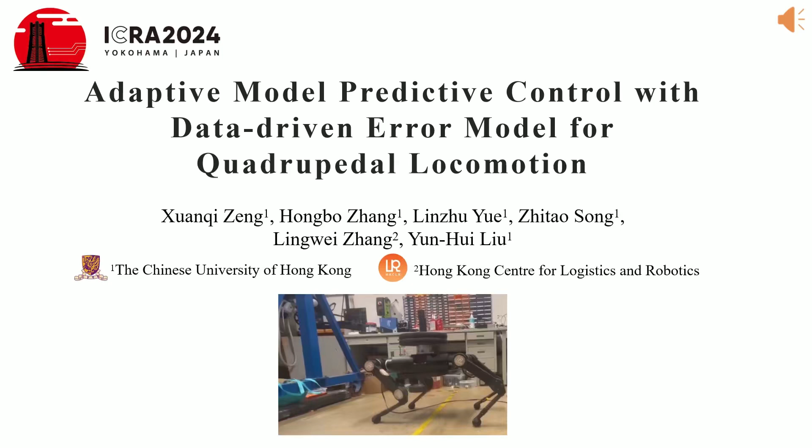I am here to introduce Adaptive Model Predictive Control with Data-Driven Error Model for Quadrupedal Locomotion to deal with the model uncertainties problem.

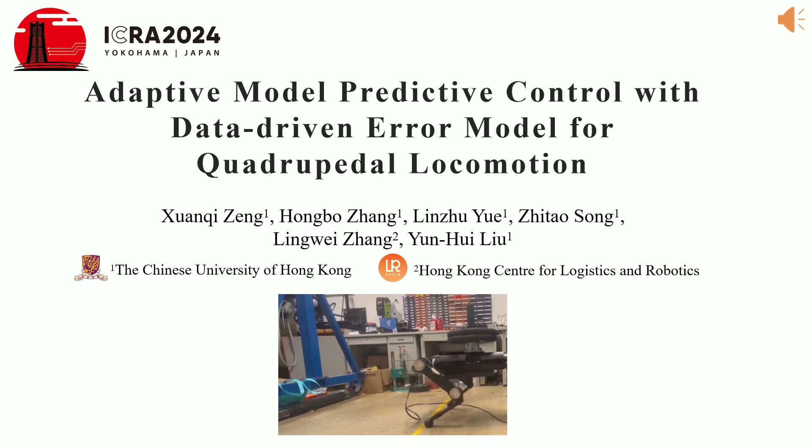Helping humans carry payloads is a common and promising application scenario for quadruped robots. However, the payload's parameters are variable for different tasks, and it is challenging to model it online without extra sensors.

Our approach leverages real-world data from sensors to compensate for defects in the control model. Specifically, we employ the autoregressive moving average vector (ARMAV) model to construct the state error model of the quadruped robot using data.

The predicted state errors are then used to adjust the predicted future robot states generated by MPC. By such an approach, our proposed controller can provide more accurate inputs to the system, enabling it to achieve desired states.

This holds even in the presence of model parameter inaccuracies or disturbances. The proposed controller exhibits the capability to partially eliminate the disparity between the model and the real-world robot, thereby enhancing the locomotion performance of quadruped robots.

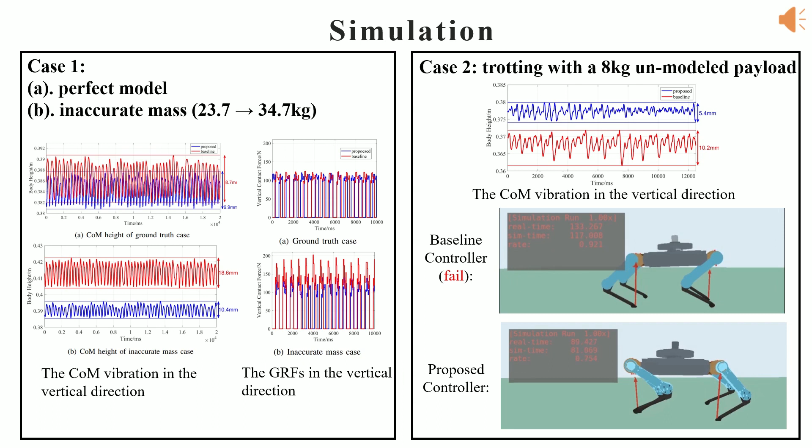The first hardware experiment is to evaluate the performance of the proposed controller in dealing with variable unmodeled payloads.

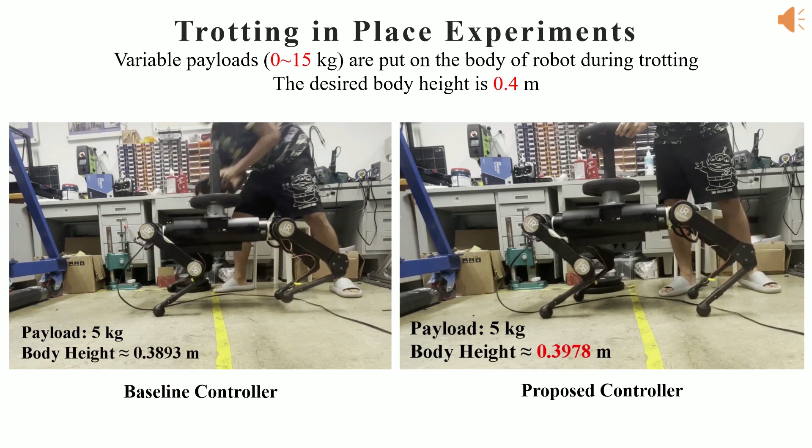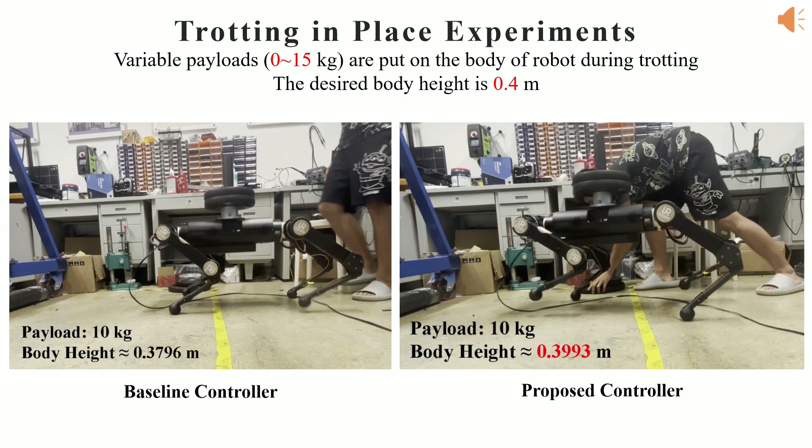In this experiment, payloads from 5 kilograms to 15 kilograms are added to the Sirius belt during trotting in place, one by one. Concurrently, the data of real robot states with the baseline controller and proposed controller are recorded to evaluate their performance.

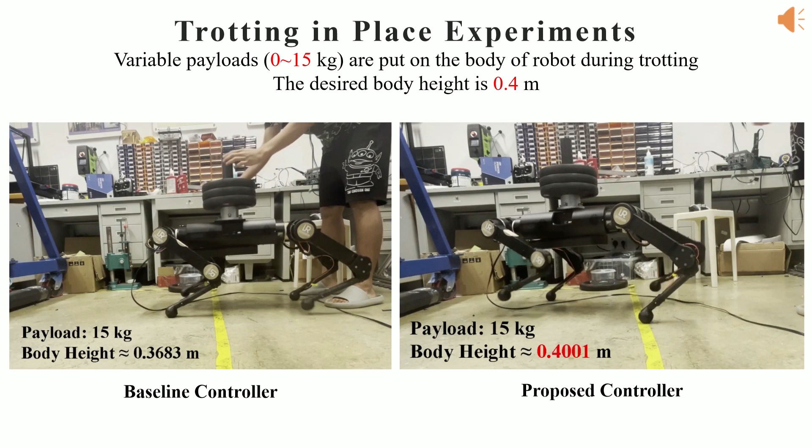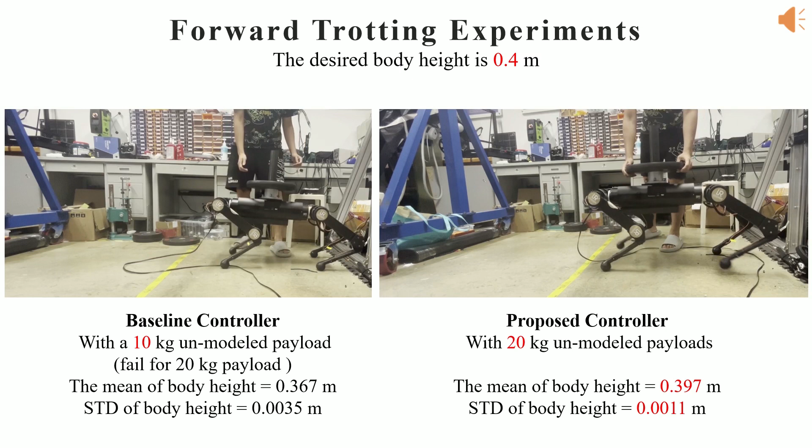The second experiment is to evaluate the performance of the proposed controller in the robot's forward trotting. The videos show that the proposed controller enables the Sirius belt, carrying a 20-kilogram unmodeled payload, to achieve stable forward trotting.

The mean of COM height is 0.397 meters with a standard deviation of 0.0011 meters.

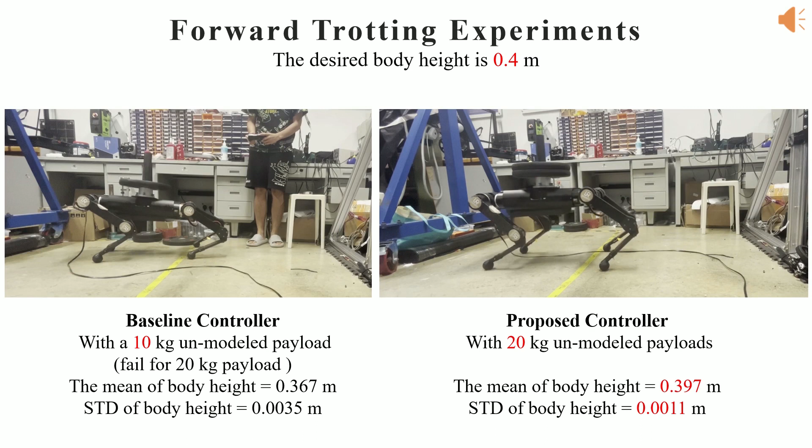However, the counterpart with the baseline controller is unstable even with a 10-kilogram payload, whose mean is 0.367 meters and standard deviation is 0.0035 meters.

The obtained results validate the effectiveness of the proposed controller in facilitating stable trotting for the robot, even when confronted with variable unmodeled payloads. The proposed controller can, to some degree, deal with the problems caused by the model's inaccuracy, linearization, and simplification in MPC.

The hardware tests validate that the Sirius belt, carrying a 20-kilogram unmodeled payload, with the proposed controller can achieve stable locomotion performance.